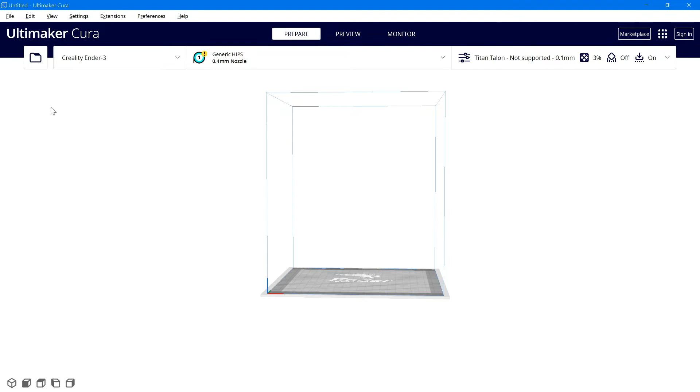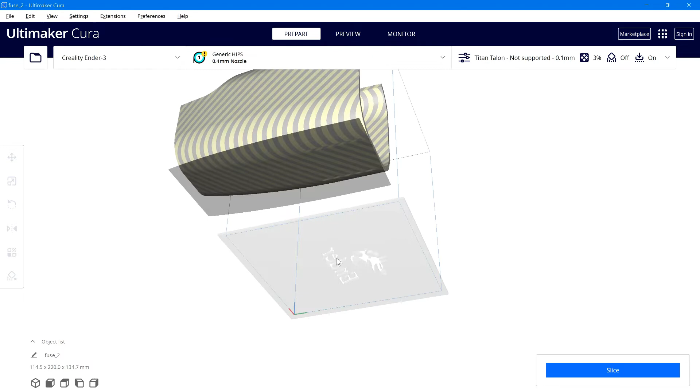Well, the second nose is still printing, but let's go ahead and look at the next part, which would be fuselage 2. Now, I don't know if this is the orientation it was meant to be printed in or not, or if that's going to matter. I'm developing questions for the people. I haven't really purchased anything from them yet to deserve to ask a question, but yeah, they've got another model on their site and got some in the wings that look kind of good too.

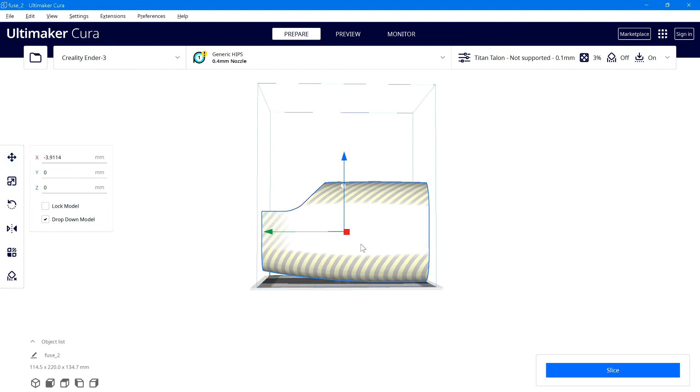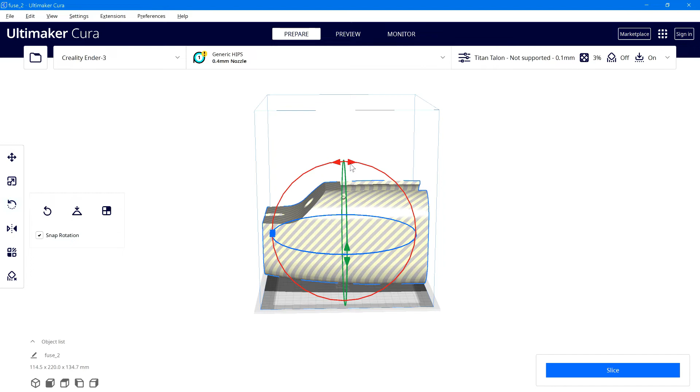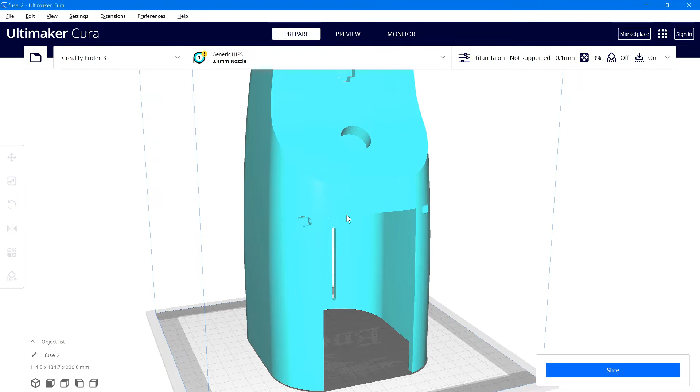Anyway, we can already see this does not fit my Ender 3 in this orientation in any shape, form, or fashion. So if they say it has to be built in this orientation for proper strength, I'm done. I can't do it. So the only thing I can do to get it in my build area is to rotate it. So if I rotate this one 90 degrees, and start looking at it, I immediately see this ledge right here. This is not going to, it won't go that far. Oops. It won't go as far as this opening is from right here.

This color scheme is bad. I wonder if I can change that. I'll try to look into that later.

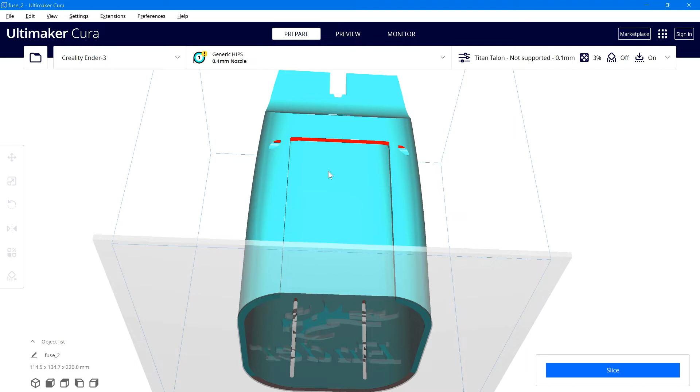From this corner to this corner of this opening. There we go. Now we can see it. From this corner to this corner, I'm worried about this. I don't think that'll work. And if I do support, see, now I'm looking at having to do support. I mean, got around it on that last one. Don't think I can get around it on this one. This is just my way of thinking now. Remember, I'm novice. But if I do support, because, well, see, here's how I learn.

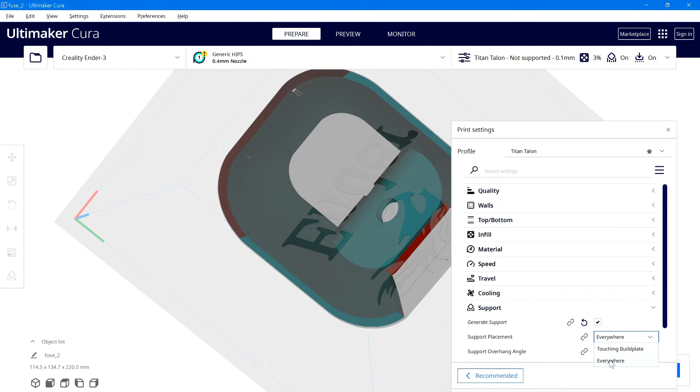Because support here, if I turn on support, I've got a choice of touching the build plate or everywhere. Now, because I don't really know, I know what everywhere means pretty much. It means everywhere. That means that right here where this turns, oops, keep clicking where I don't want to, where this turns right here, this arc right here, all this underneath here would be considered in need of support. Now, if you say touching the build plate, then this isn't touching the build plate. Does that mean it wouldn't get support? But this also isn't touching the build plate. That's what I need supported. So all of that doesn't make a lot of sense to me.

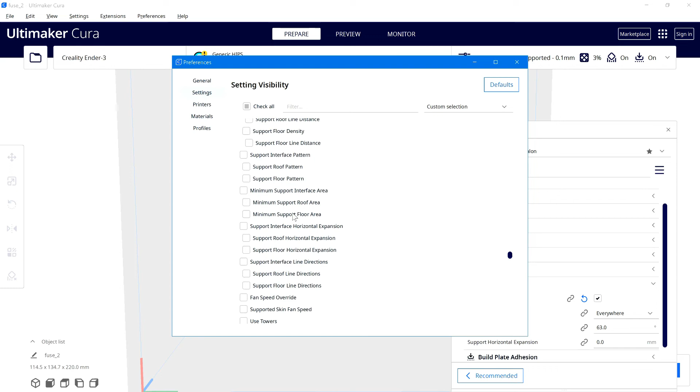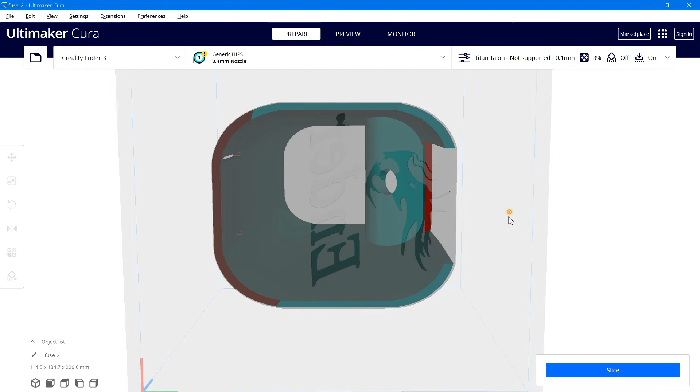I think what my brain is supposing I should be able to do, oops, under support. Come on. Right here, if we start right here with support and all the possible choices I can add out here to this before I do any more is a deep, deep dive. So I'm not going to do that here on the screen. You can see what my problem is. I'm going to turn it off here for a second. You can see what the problem is this generates for me on the little Ender 3, little baby 3D printer.

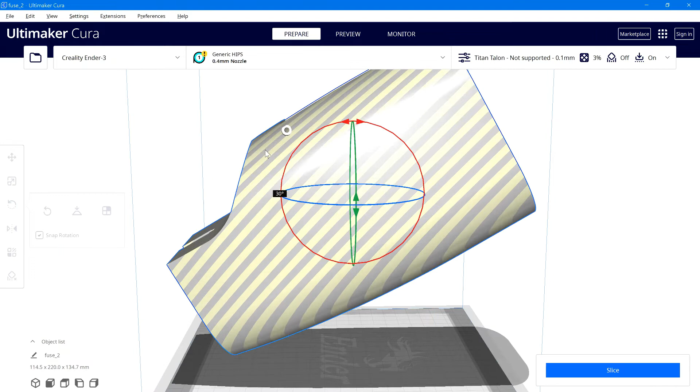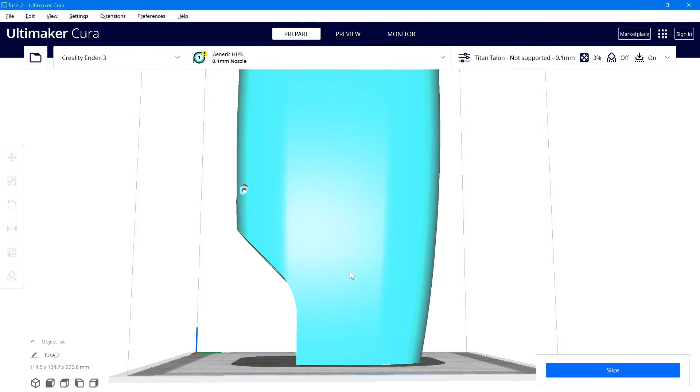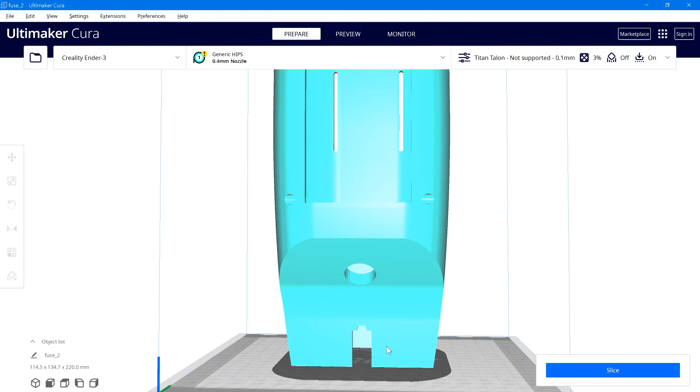But if we rotate this this way, then this no longer is a problem for support. This arc right here, from right here out, this becomes a problem for support. And if we look on the inside, I don't see anything on the inside that is a problem at all. And also support of this top arc on this hull, actually the bottom arc too, and this little cut. I think that will all be taken care of, and I think the support will only be from here down over to here. I'll do tree. I think that solves my problem. And I don't have to go on that learning deep dive. Deep dive in there someplace. I should.

That's the way. That's the way I would be learning Cura. 1 day, 11 hours, 56 minutes. Walls again, making sure everything is one. Oops. There we go. Walls. Infill. Oopsie. I assumed that this would come back from what I had set before, but it didn't. That's why better go through and check everything. I have to go through and check everything.

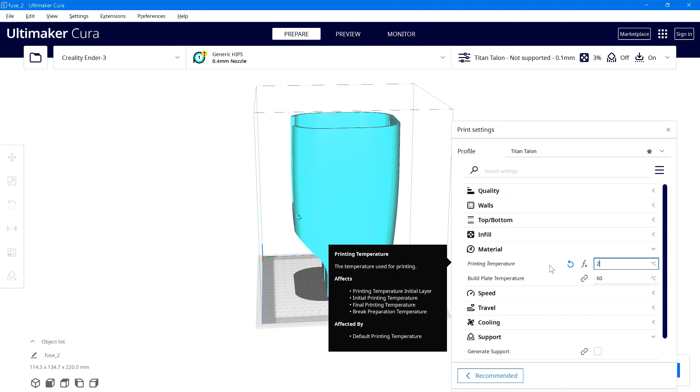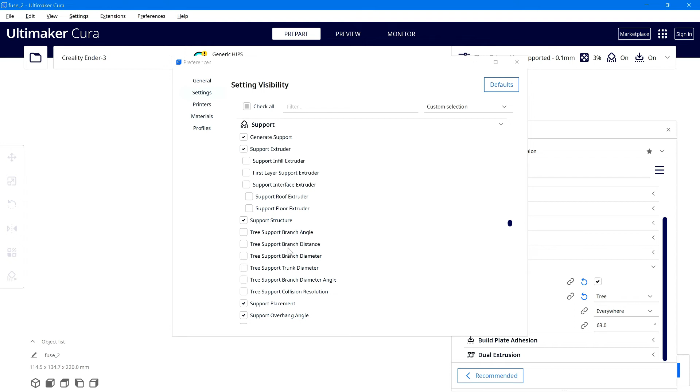I'll make that 200. Speed. That stayed for some reason. Travel I wasn't working with. Cooling. That's a default 100. Support. I'm going to go here. I'm going to go everywhere. Support structure. Okay. Tree. I use tree. I always do. See, I had to turn on support structure here in the settings to be able to get to tree here. I like tree.

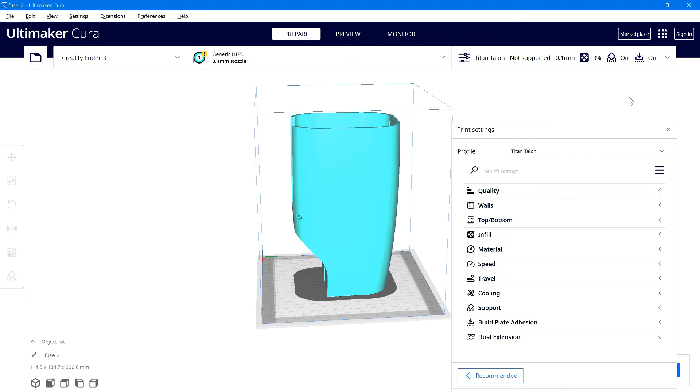Build plate adhesion raft. Okay. Titan Talon. I wonder why that doesn't save that. Create code. Update profile with current settings. I hope that takes care of that. We'll see in the future. See, I'm learning. Okay, I think that's the way it needs to be. I'll face it. I'm not really lazy. That's a lot of deep learning to do right now. I'm just impatient, shall we say.

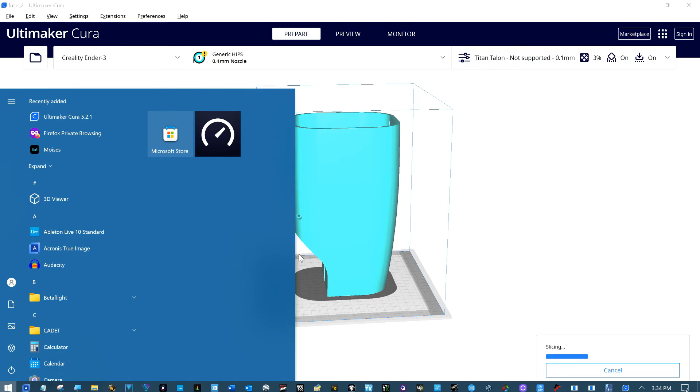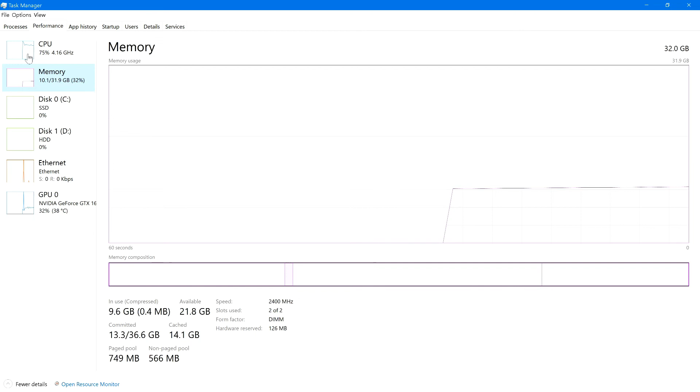This isn't slicing very quickly. These are wild prints. And this computer is, I think I've got 32 gigabytes of memory in it. Yeah. 32 gigabytes of memory, 22 gigabytes available right here, so that memory ain't the problem. What is it? CPU. And this is, it ramps. It's at 4.16 gigahertz at this point on the CPU. And it's an i7. It's running at 3 gigahertz when it's at normal mode, but it will ramp. It'll increase that clock under a load.

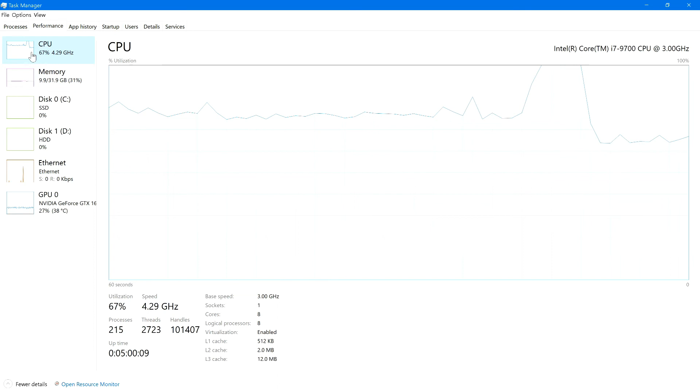So it's an i7 CPU, currently working at 4.29 gigahertz with 32 gigabytes of memory. And the CPU still wants... interesting sideline there. So 1 day, 18 hours, 43 minutes. And I think it will print. I don't think I have to learn anymore. I think these small things right here will span without support. Darn, I did say support everywhere.

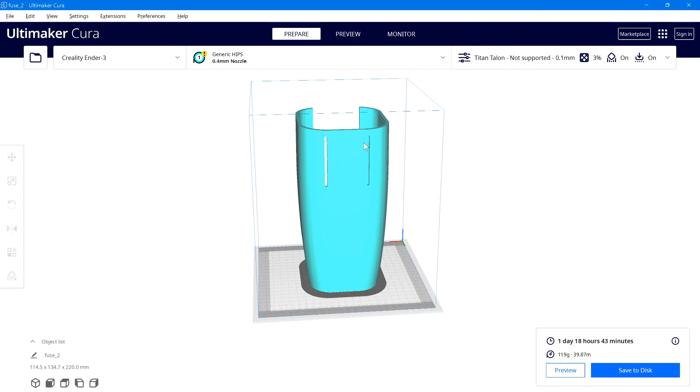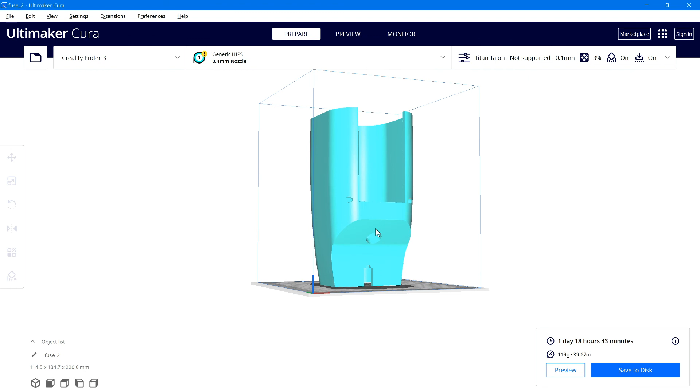It may fill support in from the bottom of this to the top of this, and this be semi-solid in there, just the crosshatch of the fill, whichever kind is currently set. And yes, I know you can go in there and set it to be less or more. I'm not going to go that deep right now. I may have to dig some support out of those slots. I think taking it out of this hole, it may put a little bit in these holes. That may be hardest to get out of these holes than anywhere. I think it'll be easy to get off this face and out of here and off of here. I'm trying not to do it with support. Support just slows everything down. Using more filament.

So there's the next one. I don't know how that's going to look when it starts printing or anything yet. That will be tomorrow. I just go in and put my space in front of what they have it saved as and save it in that subdirectory, and that's my project for the start of my build tomorrow. Tomorrow I'll start the build when I get up, and almost 2 days later, only, I'm not going to count it down to the minutes, we'll call that 43 hours, only 5 hours short of 2 days, 48 hours of build time, which I'm not complaining about.

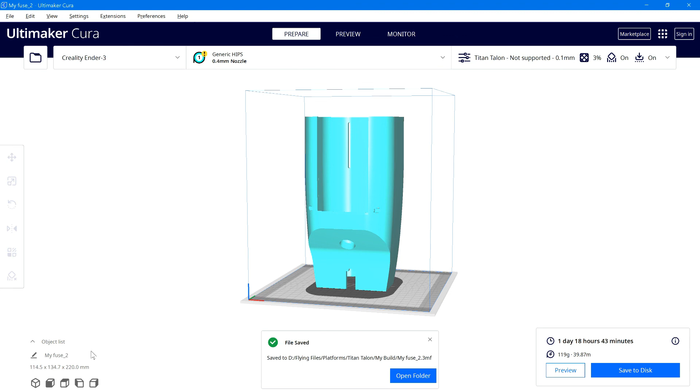This is my Ender 3. It has nothing to do with this gentleman's design, or lady's design, this person's design. It has to do with my Ender 3, the way I have it configured, the way I've set up to print this filament, and it could all be all wet. I don't know yet. It's my first time. Leave me alone. I'm having fun.

All right. So I'll probably do a little video tomorrow on how the second nose printed, or maybe later tonight. It should finish about 9 o'clock tonight, I hope. Earlier than this. It finished last night about 2 o'clock in the morning, and I was dead. And then this one, of course, will begin to print, and there really won't be a whole lot to say about this one until it's the weekend.